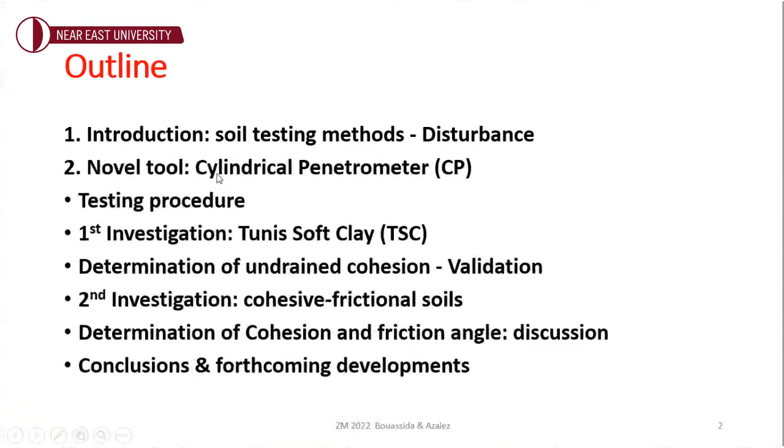The outline of this work is: introduction, so I will remind about soil testing methods and what happens with soil disturbance. Then I will present the novel tool called the Cylindrical Penetrometer, and we will present the testing procedure.

Using this tool, the first investigation was on the determination of the undrained cohesion of Tunis soft clay. For this, we suggested a method of determination, and there was validation of the cylindrical penetrometer results with the classical shear test.

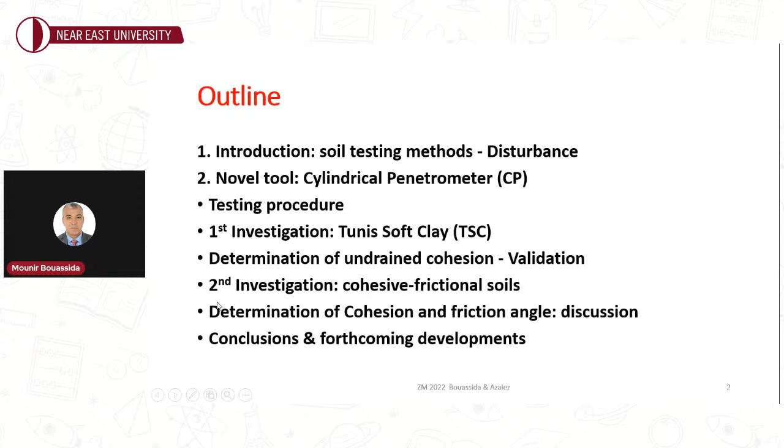As a second investigation, we will talk about the shear strength of cohesive frictional soil, and we will explain how we can determine the cohesion and the friction angle. We will discuss the proposed results, and then conclusion and forthcoming development of this work.

When we deal with in situ soil testing methods related to disturbance, we can see on this slide, for example, in the first case on the left, when we do the pressure meter test, which needs to create a borehole, the vertical sides of this borehole are disturbed. Then we introduce or put our cell measurements, and as such, when we measure the so-called limit pressure, we measure it in disturbed soil.

This is to say we are measuring failure characteristics affected by the disturbance of the soil prior to the measurement of shear phase. On the contrary, we remind about the CPT or SPT test. We have the tool placed at the bottom of the boring, and for preparing the test, we have an initial penetration without measurements, and after that the tool penetrates the soil to measure the tip resistance or the blow count.

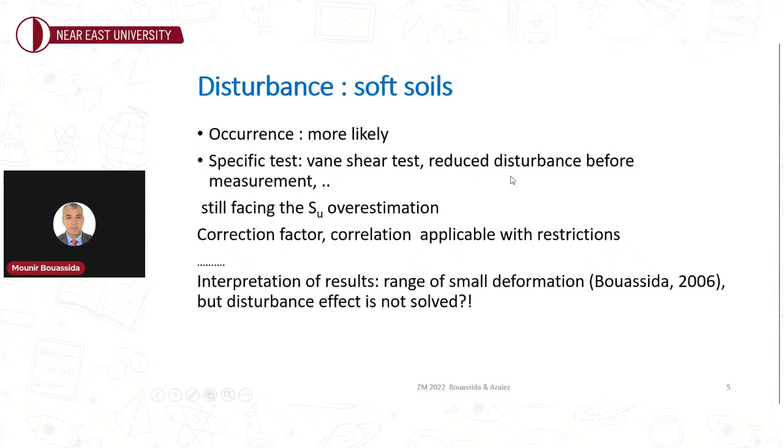In the same context, when we deal with soft soil, we have disturbance. We know that prior to the in situ test or prior to the laboratory test, the occurrence of disturbance is more likely. For example, to reduce the disturbance effect from soft soil, there is the vane shear test,

which enables us to reduce the disturbance before the measurement of the SU. But with this device or apparatus, we still face the overestimation of the undrained cohesion. And using the same methodology, we have to introduce correction factors and correlations, which are not always applicable, or applicable with restriction depending on the soft soil we are considering.

We suggested earlier for the vane shear test to limit the measurements of the torque in the range of small deformation. And we suggested the method to determine, maybe more safely, the undrained cohesion, to not overestimate these characteristics, but still the disturbance effect is not solved.

This means using the vane shear test, or performing the vane shear test, when you penetrate the soil before the measurements with the blade of the vane apparatus, we have some disturbance of the soil.

And as such came the idea of how to think about a new tool or new method of measurement to avoid the disturbance effect, and also to provide a direct determination of the cohesion and the friction angle for all soil types without using correlation. This is the main purpose.

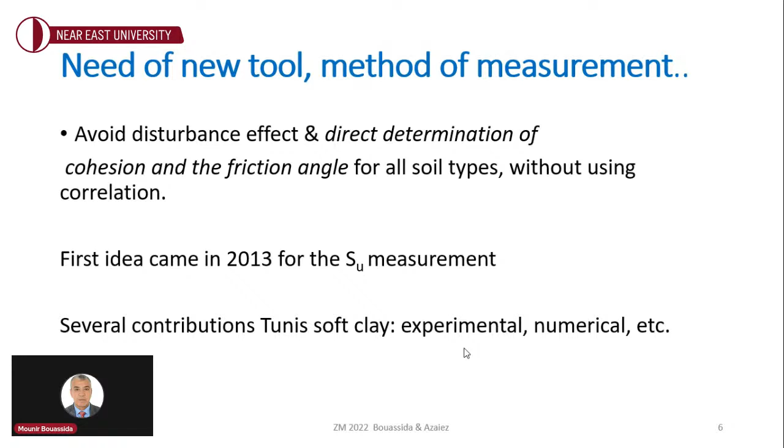The first idea came in 2013 for the SU measurements, because in our laboratory we investigate very much the behavior of Tunis soft clay, characterization, etc., using different experiments and numerical approaches.

And the first investigation concerned the Tunis soft clay. We know soft soil, its characterization informs that it has low permeability, colloidal and compressible structure, and the undrained shear resistance is reduced to undrained cohesion. The soil is purely cohesive.

But when sampling in soft clay, we have soil disturbance, and again we have unreliable determination of the undrained cohesion. So the tool we are suggesting, first we called it the cylindrical shear tool, but later, or recently, we changed it to the cylindrical penetrometer. So what are the components of the tool?

We can see here that this is the tool, and it's composed of a hollow cylinder, part 2, and a piston. The piston is part 3, on the upper side.

The piston itself comprises two components: an annular ring, part 4, and a headless socket screw, part 5. And the annular ring itself comprises an inferior disc, part 6, the lower part, and a superior disc, part 7, which we can see here.

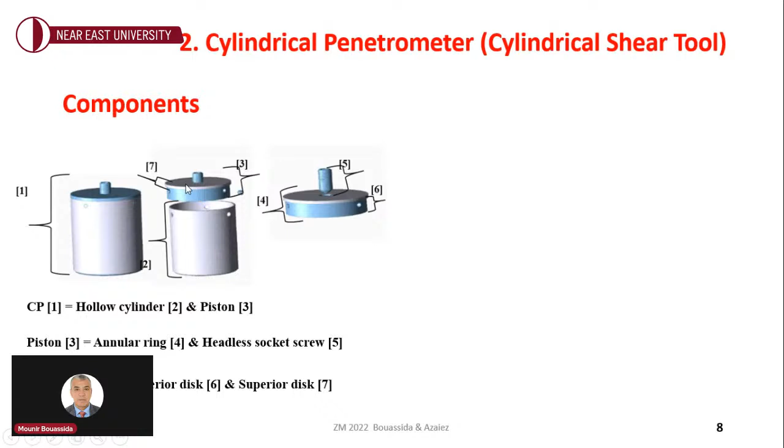So how does it work? The cylindrical penetrometer is a shear tool, and we can say it's a thin hollow cylinder with a sharpened tip. At the lower part, we have a sharpened tip of this cylindrical penetrometer.

So after preparing a soil sample, we need to position the tool. On the slide, sometimes you will see CST, the first name we gave it, sometimes you will see CP, but it's the same thing.

We need to position the tool at the upper side of the soil sample, and then similar to the SPT test, we will make an initial penetration without measurements. That means we will have a downward displacement of the tool, and we have an initial penetration D0.

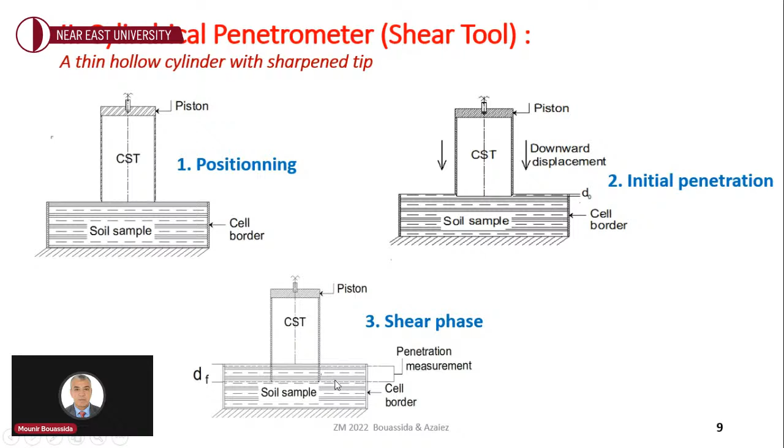Then we will start the shear phase, which is the penetration of the CP or CST over a distance going from D0, the initial penetration, to the final one, DF. So it works like a penetrometer, but without a tip. There is no tip, only the shaft component.

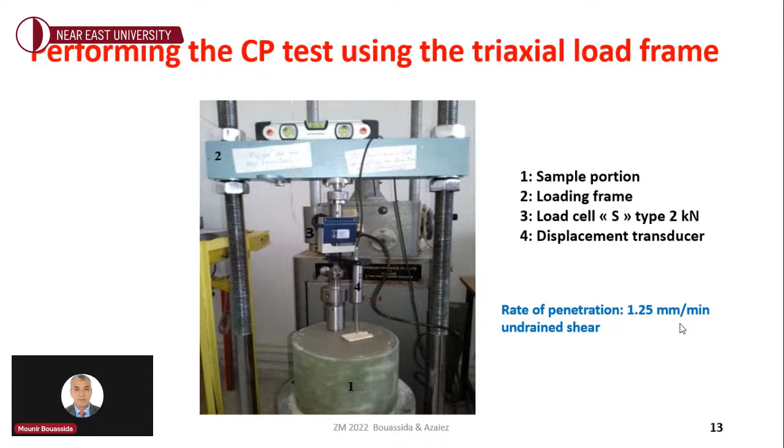Now, this is what we performed for the test, but how will we determine the SU? First of all, we can say that in terms of shear strain developed during the direct shear test and the cylindrical shear tool, or the CP, cylindrical penetrometer, there is some similarity.

But the main difference is the following: when we perform the direct shear test, we have soil-to-soil failure. But when we perform the cylindrical shear tool, we have a soil-tool failure, or CST failure. That means we measure the interface characteristics.

But first of all, for a given penetration, we can calculate the sheared area by the penetrated tool. That is both the shaft perimeter multiplied by this penetration, from inside and outside. So this is the total sheared area.

But we know, as we saw, the friction angle of purely cohesive soil is mostly zero, and the shear strength reduces to the undrained cohesion.

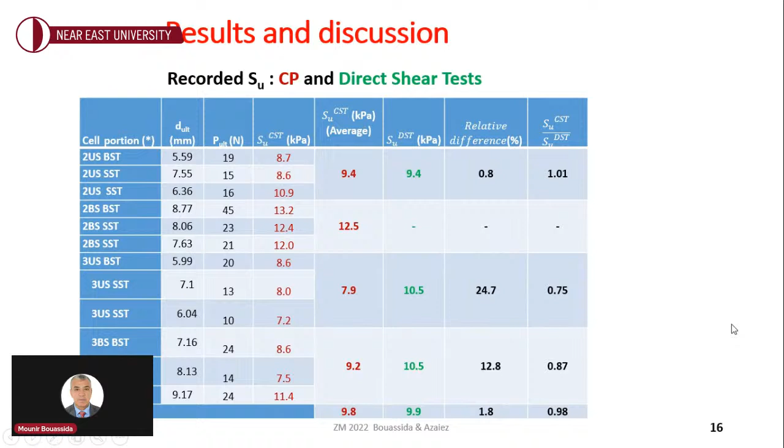But of course there is some relative difference depending on the case. We can see here that the relative difference is quite small, and the ratio between the two values is roughly 1. Only in this case - regarding this ratio, if it is lower than 1, that means the SU measured by the CST is lower than the one measured by the direct shear test. But overall, in terms of average value, depending on the case, we are in the same range of the determined undrained cohesion.

As for the purpose of comparison, to assess the CP test results for Tunis soft clay, in an earlier work we performed undrained triaxial tests, but on consolidated samples - it's like consolidated undrained. As we can see here, of course the more we consolidate, the more the SU, which relates to the failure resistance, increases a bit.

But here we can see we have the data for the test we performed under 30 kPa. And second, considering the direct shear test SU envelope from different tests, we can say that we can measure accurately the undrained cohesion of a soft soil using the CP tool as compared to the classical triaxial shear test.

Now, of course, in our thinking, it is possible to measure the undrained cohesion - maybe simpler than the cohesion of frictional soils. And as a continuation of the first investigation, we can ask this question: is it possible using the CP to measure the friction angle of a purely frictional soil?

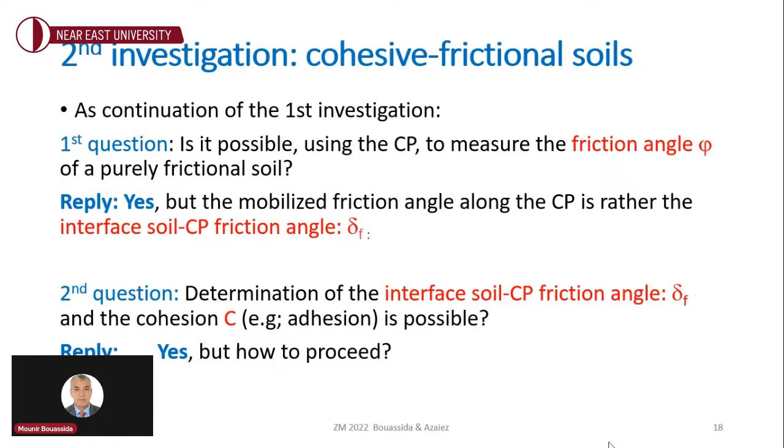So, this is maybe the part of the presentation which is not included in the paper I submitted to the conference. So, in terms of experimental investigation, we took a quarry sand, usually used for construction, and we determined the grain size distribution of the sand.

It is likely a well-graded sand with the specific gravity 2.643. And as it is a loose sand, from the direct shear test we measured about 29 degrees friction angle and 0 cohesion.

Then we performed two states of reference, meaning we compacted the sand both in normal Proctor condition and modified Proctor condition. Of course, we needed to determine the optimal water content for the two compacted states of reference. As we can see here, for the normal Proctor test the maximum dry density is a bit low, 18, but for the modified Proctor test it is rather 18.5, and the water content is a bit lower, say 10.5 or 8.5 for the modified Proctor.

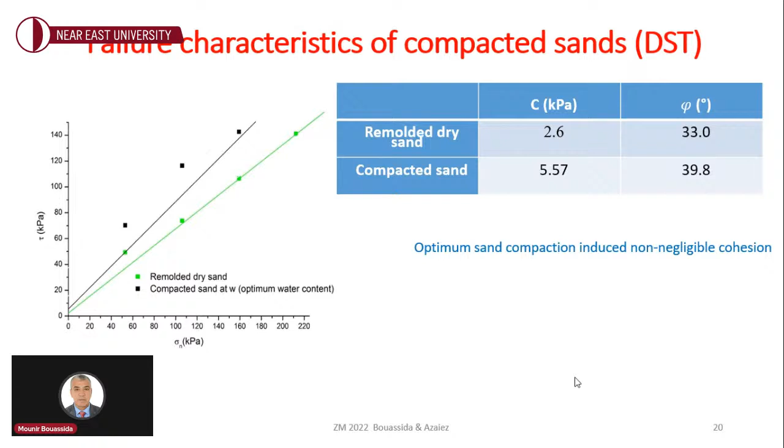Now, performing the CP test on those compacted sand at optimum water content, this is what we obtain in terms of recorded vertical force in Newtons and the penetration of the CP.

We can see we have a cloud of dots, and the average trend can be written under this form. That means, because we have fluctuation when measuring, I didn't show you the load displacement curve during the test, but we have some fluctuation. We can say that the ultimate load is proportional to the ultimate penetration.

But the problem is, as we mentioned for the soft clay, we have an increasing force. Which couple do we have to take as ultimate force and the corresponding ultimate penetration to consider for determining the failure characteristics? This is the problem.

And then here we move to the method of determination we are suggesting. So let us start first: the soil is assumed cohesionless, that means cohesion is zero.

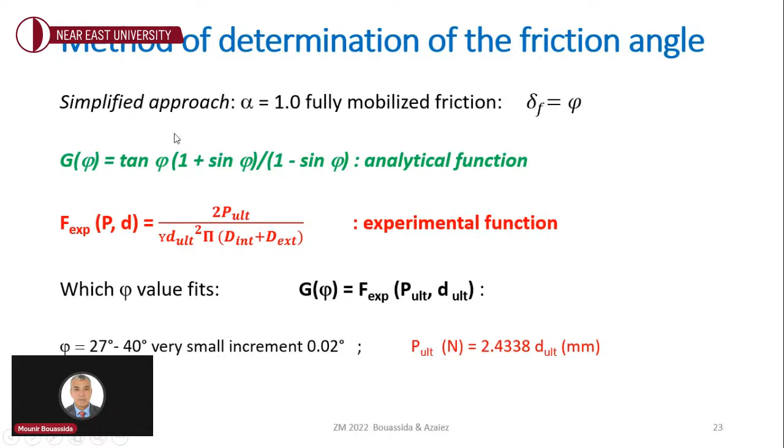And what we will do is vary the ultimate penetration and the vertical force used to calculate the experimental function, along with variation of the friction angle to calculate the analytical function. Of course we need to use Excel solver, for example, to look for the phi value considering the relative difference between the experimental function and the analytical function in terms of percentage, which is quite small.

For example, I will show you the Excel sheet later. So if I assume cohesion is 0 and neglect the weight of the cylindrical penetrometer, we determined about 39.4 degrees as the value of the friction angle. This value is a bit overestimated regarding what we measured in terms of shear strength in the direct shear test. So the way we are thinking, the way we are doing this, will help us.

So now we need to take account of the cohesion and investigate the case of a cohesive and frictional soil. Briefly, what can we say? The failure stress in terms of shear stress is C plus horizontal stress times tangent of delta f.

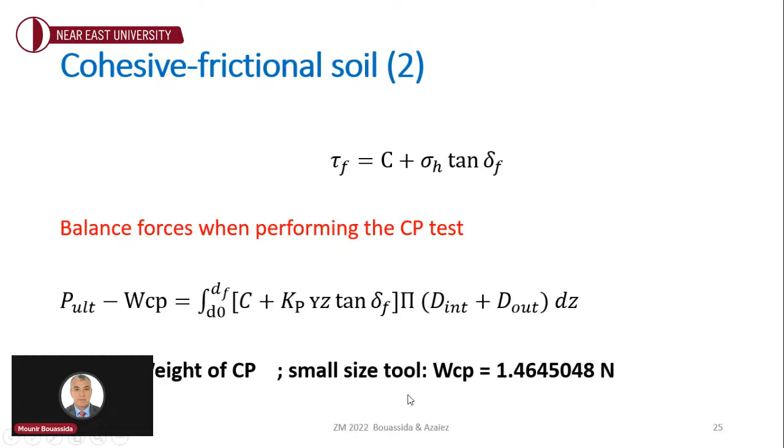And the balance of forces when performed with the CP test, I cannot go through details, but we can write P ultimate minus the weight of the cylindrical penetrometer equals this quantity. For example, using the small size tool, the weight is about 1.46 Newton. And now the expression of the analytical function remains the same, but the one of the experiment is changing.

Why? Because we have the cohesion component. Now, after the direct shear test, we measured cohesion about 5, and the friction angle was about 40. I will show you right now on the Excel sheet that we obtained a very similar value using this method of resolution.

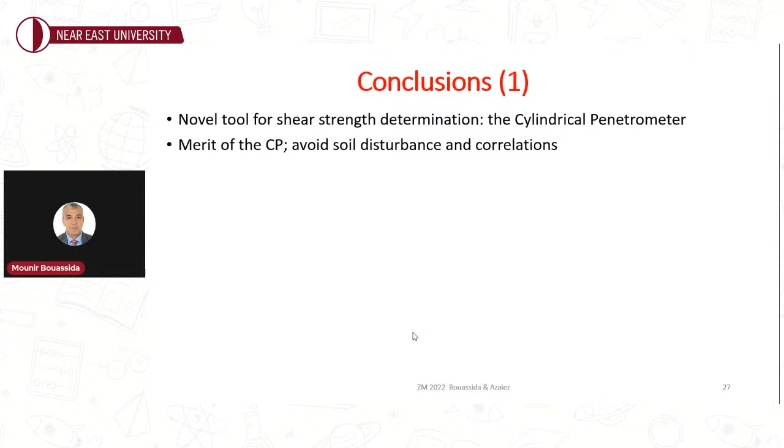So now to conclude about this work, we suggest a novel tool for shear strength determination, called the cylindrical penetrometer. The merit of this tool is to avoid soil disturbance and the use of correlation at the same time.

From experiment, we manufactured two cylindrical penetrometer models, and we considered first the constitution of two soft clays and performed some tests. It's not only determination of SU, but we suggest a novel method of determination of SU specific to cylindrical penetrometer, and the measured undrained cohesion is found somehow dependent on the CST model diameter. Using the small size or the big size tool, we determine quite similar SU values.

The assessment of the CP test results for soft clay was done after comparison with direct shear and triaxial shear test results. The recommendation, of course, is to do more tests for other, maybe soft soils, etc.

Now the second part of the conclusion, regarding the cohesive frictional soil, we can determine the friction angle and the cohesion, but the method assumes a presumed soil cohesion, and the friction angle can be determined accurately. The assessment of CP results with direct shear test is promising.

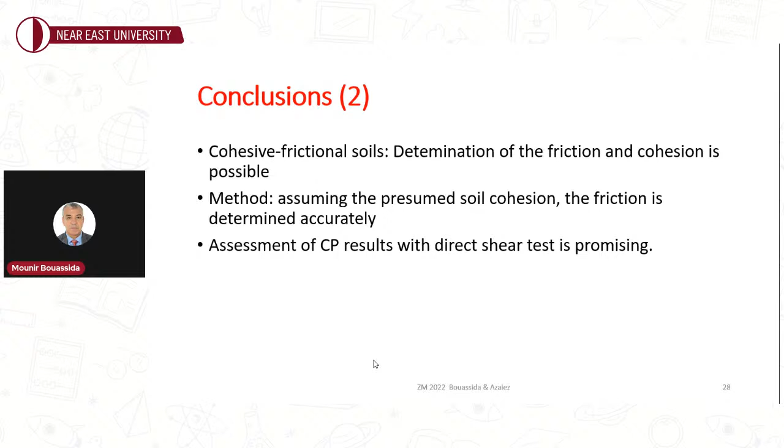So after the Excel sheet calculation I am suggesting, for common development, we use the CP for testing intact soil specimens collected from geotechnical investigation, in situ geotechnical investigation. We already started this work. And the CP, as I hope you understood clearly, is a model of Shelby tube, which we usually use to collect samples.

But in situ investigation is very feasible using this tool, and it is programmed to use the cylindrical penetrometer to determine the cohesion and friction angle using an in situ test, say in full scale condition.

About publication, because it's recent work, in 2021 we had a paper at the Third Asian Conference on Physical Modeling in Geotechnics, and we patented this tool at the national level in Tunisia, and we submitted the PCT. Let me tell you that for the national one, it is agreed, but for the PCT, the reviewers say that it's not original work, but we did not respond to them yet.

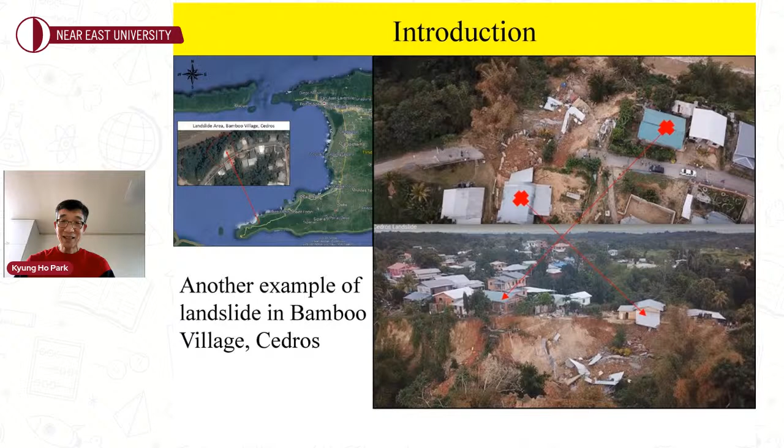Then one question arises: what caused these slope failures? First, it is not rain, which is the most common trigger of slope failures around the world. There was no record of rainfall before and during the slope failures. By the way, the local residents claimed that they saw leakage from the water pipe, and they believed the slope failures were caused by the leak in the water pipe. Could a water pipe leakage be the cause of these slope failures? This study was started to find an answer to these questions.

For the methodology, first we collected a geotechnical investigation report from local companies. EISL, a local company, conducted this landslide investigation in 2016. From the EISL landslide investigation report, a typical cross-section for landslide B was obtained as shown in this slide, and information on the soil condition of the slope was summarized in this table.

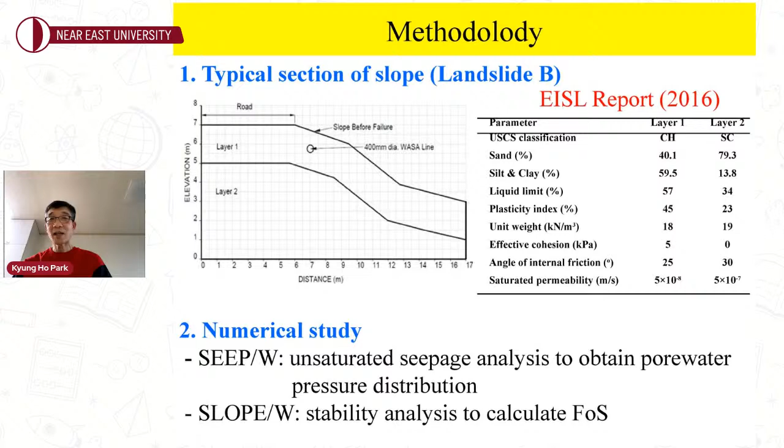This slide shows a typical modeling mesh used in this study. One of the important factors in this numerical study is how to model the water leakage. In this study, the flow rate was used, varied from 10 to the minus 7 to 10 to the minus 6 cubic meters per second at the location of the pipe expected to be leaking water.

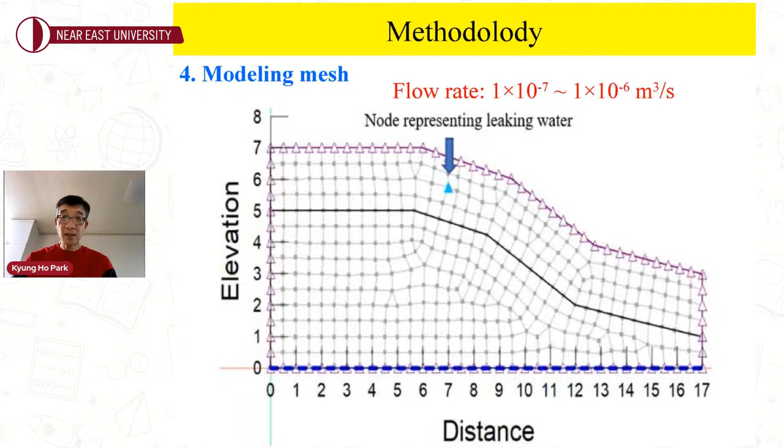From this result, we can see the flow rate is one of the important factors that can be considered in the slope stability analysis. Next slide, please.

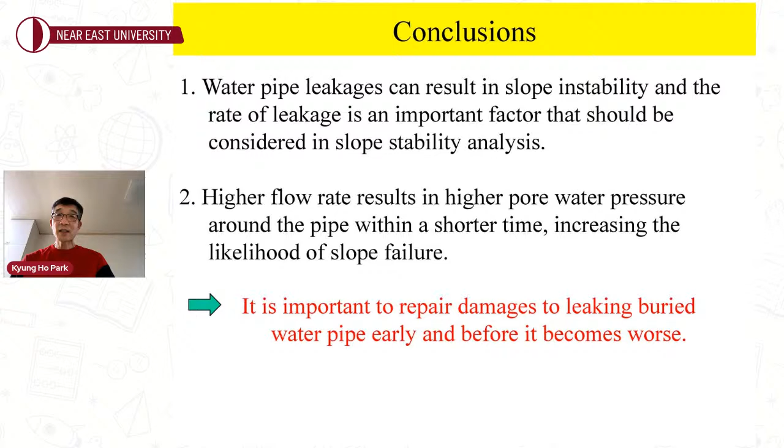Second, higher flow rate results in higher water pressure around the pipe within a shorter time, increasing the likelihood of slope failures. Thus, it is important to repair damages to leaking buried water pipes early, before it becomes worse. This is all my presentation, and thank you very much for your attention.

Thank you, Mr. Park, for your presentation. Interesting issue about slope stability and pipe leakage. I was wondering if the depth of the failure surface is known, the zone of the failure surface, because what I was thinking is the landslide may have caused the pipe to be damaged and leak.

Oh, that was also possible. It's a really good question. I was also thinking about that, but I still cannot give a clear answer for that. It can happen in certain areas in Trinidad.

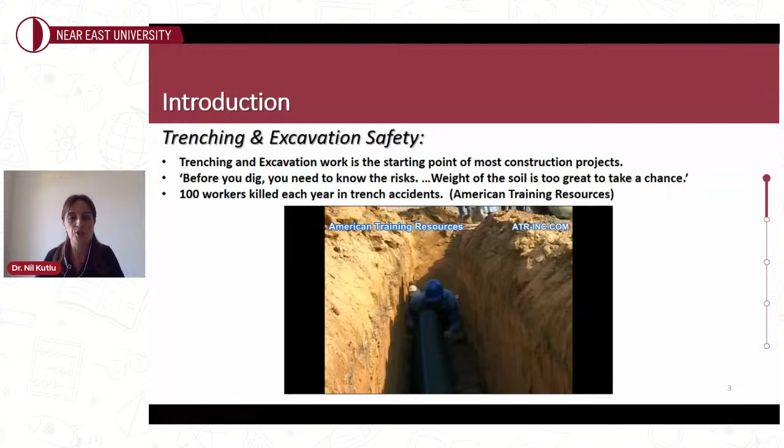The safety in trenching and excavation works is the main motivation for this study. Trenching and excavation work is the starting point of most construction projects, mostly associated with unsupported cuts. As we can follow from the video, this type of work is dangerous - the collapse of even a 1.5 meter height unsupported cut can kill field workers due to the great weight of the soil.

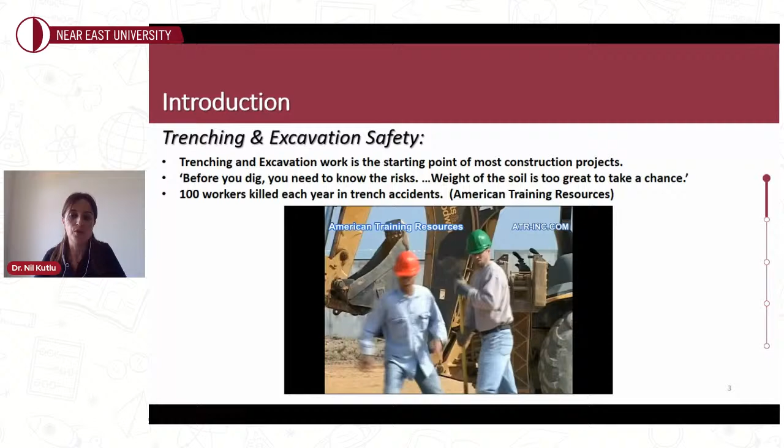According to American Training Resources reports, more than 100 workers are killed in trench accidents each year on average, which means every week 2 workers die in a trench cave-in. Therefore, before we excavate, there is a lot that we need to know, and also a lot to estimate about the soil.

On the other hand, if we are able to excavate without support, especially in sandy types of soils, this usually means that the soil is in a state of unsaturated condition, where the expected behavior can be explained more accurately by the use of unsaturated soil mechanics principles.

We can simply say that the stability of cuts is controlled by the matric suction distribution in the field for the unsaturated zone above the groundwater table level. The critical height and the stand-up time are the two most important factors that need to be considered during an unsupported cut design.

Critical height can be estimated using different approaches: analytical estimations, numerical estimations, and experimental validations. In the research we are presenting, we use numerical estimation and experimental validation methods and compare the results to see if they match.

So the testing program - first I would like to start. The entire experimental program aims to determine the critical height of an unsupported vertical cut in sandy type soils for varying water table levels associated with different suction profiles that actually occur.

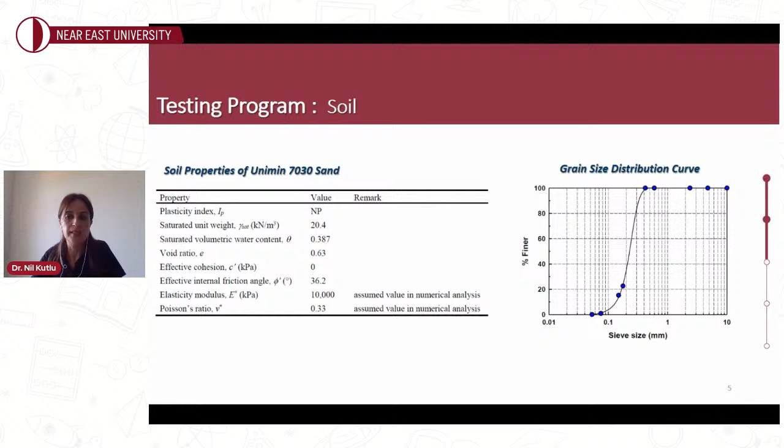For this purpose, the studied soil is an industrial sand, referred to as a fine sand. In the slide, you can see the basic soil properties and also the grain size distribution curve.

To give more details about the testing setup and equipment, the experimental testing program was performed at the University of New Brunswick in the Geotechnical lab. The test setup consists of a large-scale soil tank with dimensions of 1.5 meters by 2.2 meters and a total height of 2.4 meters. The sand is placed inside the tank by compaction.

Then, with varying water levels, the critical height for the unsupported cut is determined. But in the context of this paper, only the water level condition located at 0.7 meter depth from the surface is considered. So I'm going to share the experimental and numerical results only for the groundwater table level located at 0.7 meter depth from the tank surface.

In order to determine the matric suction variation, high-capacity tensiometers are used, and the measurements indicated that in the unsaturated zone, a hydrostatic negative pore water pressure distribution has been maintained.

The next question can be, how did we simulate the excavation? To simulate the vertical excavation, 0.1 meter height retaining panels, as seen in the figure - the black retaining panels, each with 0.1 meter height - are used, and they were removed one by one until general shear failure took place. At the very end of the slide, we can see the failure incident, the plan view at the moment of the failure is shown in the figure.

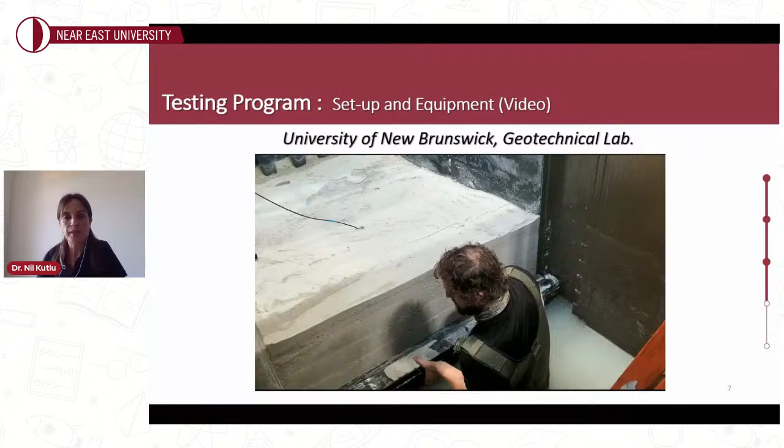As I said, here we only consider a single water level. In our case, failure took place when we reached the critical height between 0.7 meter to 0.8 meter, when panel 8 was removed. So the general shear failure looked like this once the critical height is obtained.

And then we have our second part of our study as the numerical analysis part. The testing program was also simulated with Plaxis 3D to estimate the critical height. The sand was modeled here as a Mohr-Coulomb material using effective shear strength parameters. The Van Genuchten model is used for the soil water characteristic curve definition, which fits well with the measured data. Here in the figure we can see the Plaxis 3D model, including the geometry, mesh, and boundary conditions, to simulate the experimental conditions.

In Plaxis 3D, if we consider the unsaturated condition, the contribution of matric suction on total cohesion is also considered by the model proposed by Vanapalli et al. in 1996. This model is also adopted in Plaxis 3D.

On the left-hand side we have the variation of total cohesion with depth. We had the maximum total cohesion of 2.7 kPa, obtained at 0.25 meters from the test tank, and as we have seen it reaches zero once it is below the groundwater table level. Above the groundwater table level, the tensiometer measurements confirm that there's a hydrostatic negative pore water pressure distribution.

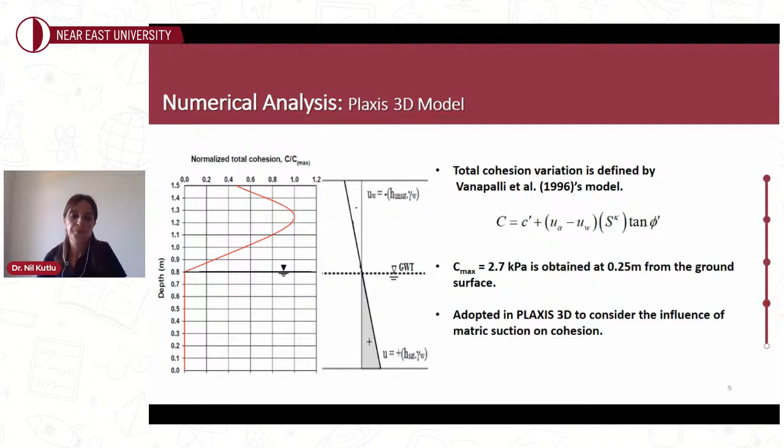For the numerical analysis results, the stability checks and stability analysis were performed using the Plaxis 3D model. During these stability models, the stability of the excavation was estimated by calculating the global safety factor using the phi-c reduction method. The table shows these details by depth of excavation.

We simulated the experimental testing setup completely, doing a stage analysis step by step. By removing the panels, we calculated the global safety factors, and we can see that with each excavation the global safety factors are reduced.

It dropped to 1.15 after the 7th panel was removed in the model, and removal of the 8th panel caused failure in the unsupported cut. This indicates that the critical height is again reached between 0.7 meter and 0.8 meter, similar to the experimental results.

Another two interesting results we would like to share: looking at the Plaxis 3D results in plan view, the disturbed soil zone formed an arced shape area, indicating the boundary effect of the test tank. Also, we attained a failure wedge making an angle of 62 degrees with the horizontal, which matches the slip line angle for the active condition.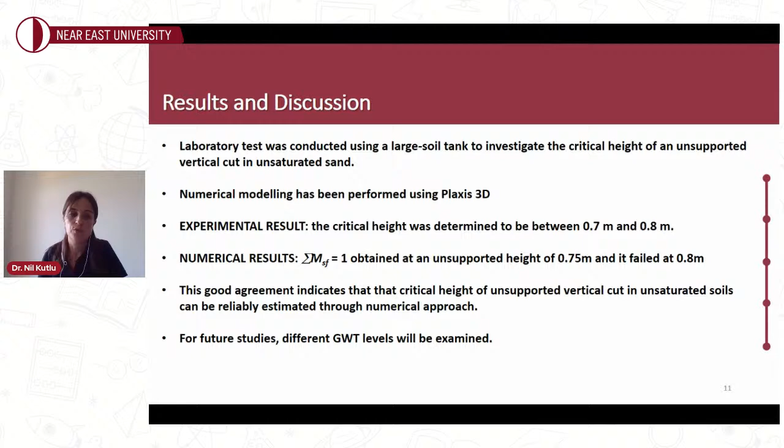To sum up the results and discussion, we performed laboratory tests using a large-scale soil tank to investigate the critical height, and we also performed numerical modeling analysis using Plaxis 3D. Both the experimental and numerical results give the same critical height, between 0.7 meter and 0.8 meter. This good agreement indicates that the critical height of unsupported vertical cuts in unsaturated soils can be reliably estimated through numerical approaches. For future studies, different water levels will also be examined. Thank you very much.

I appreciate it. Thank you, Ms. Kutlu, for this nice presentation. Thank you, we will be moving to the next presentation. Okay, thank you, sure. Have a good day. We have the next speaker, Mr. Yan Liu, I assume is here.

Yes, welcome, Mr. Liu. This topic will again be related to rainfall and slope stability. You can share your screen. Yeah, I'm sharing. Okay. You are joining us from Japan, right? Yeah, yes. Welcome. Thank you. So sharing, it shows it's uploading. Let's see. Okay, it's not on the screen yet. It's processing. Okay, let's see. Okay, maybe. Yes, now we can see your screen. Thank you. You can start.

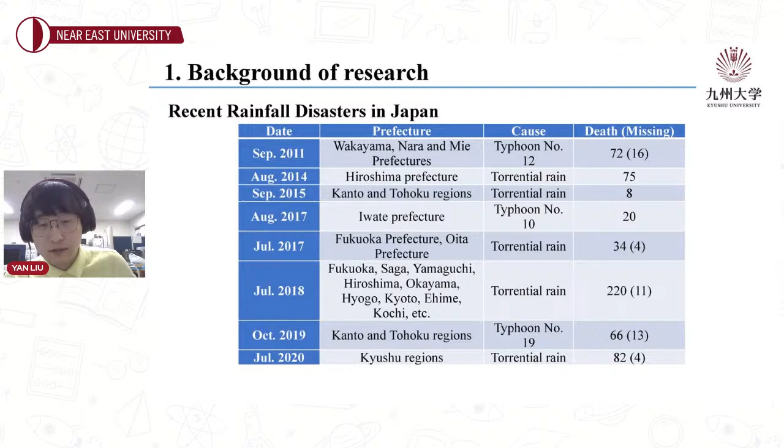This table shows the recent rainfall disasters in Japan, and we can see that every year a lot of people are affected by rainfall-induced disasters.

This is the failure modes of the rainfall-induced landslide. From the analysis of different kinds of landslides, we find there are mainly two kinds of landslide failure. One is deep failure: the slope becomes saturated from top to bottom because rainfall infiltrates, and the slip crosses from the saturated to unsaturated part, causing a landslide.

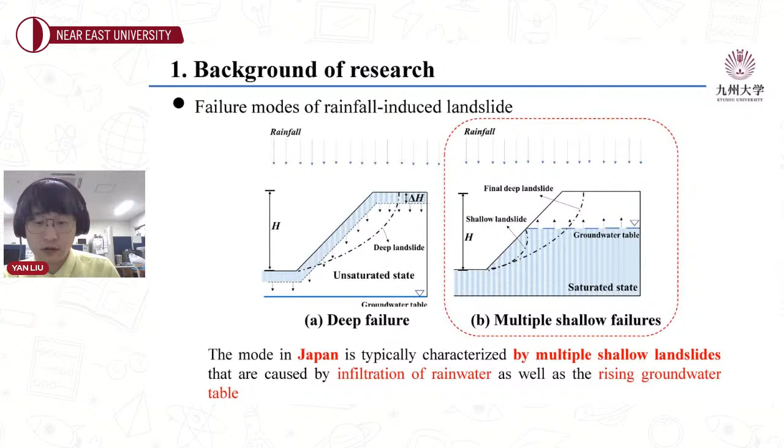Another is shallow landslide, which occurs from the bottom to the top area due to the increase of the groundwater table. In Japan, we find a lot of sandy slopes outside, mainly caused by shallow landslides. So this part of the research focuses on shallow landslides.

The objective of my research is to identify the main hydrologic behaviors of sandy slopes. We will also evaluate the local safety factor at different rainfall times and rainfall groundwater table levels, and obtain the displacement and flow state under rainfall.

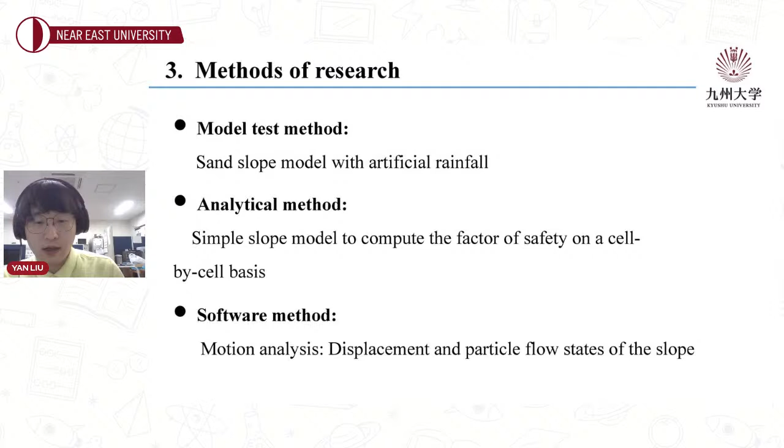So we will conduct the sandy model test with artificial rainfall, and also do analytical analysis to get the safety factor. We will use software to get the displacement and velocity of soil within the slope under rainfall conditions.

For the software methods, we use motion analysis, which can be used to get the displacement of soil, the flow state of the slope, and the soil motion track. We use PIV to get the soil velocity. This is the principle of the motion analysis.

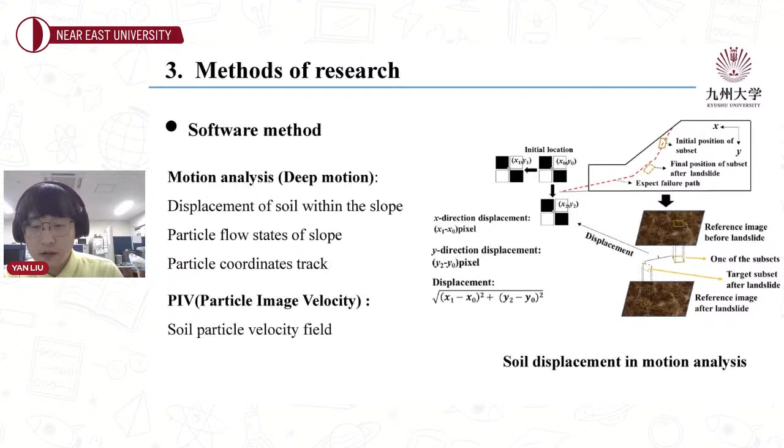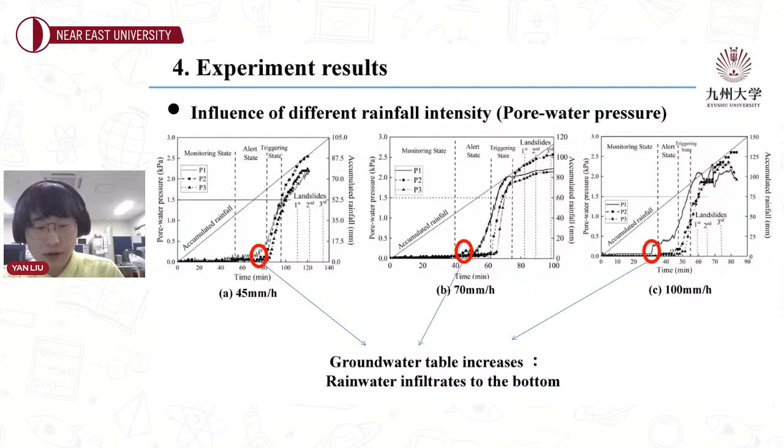This is motion analysis from our experiment. It records the soil movement at 100 millimeters per hour. We can see that first is the initial slope, which is in an intact state.

The first landslide happened at 59 minutes, the shallow landslide occurring at slope toe. As time increases, we find the second failure from the bottom of the slope, and the last landslide failure starts from the top of the slope.

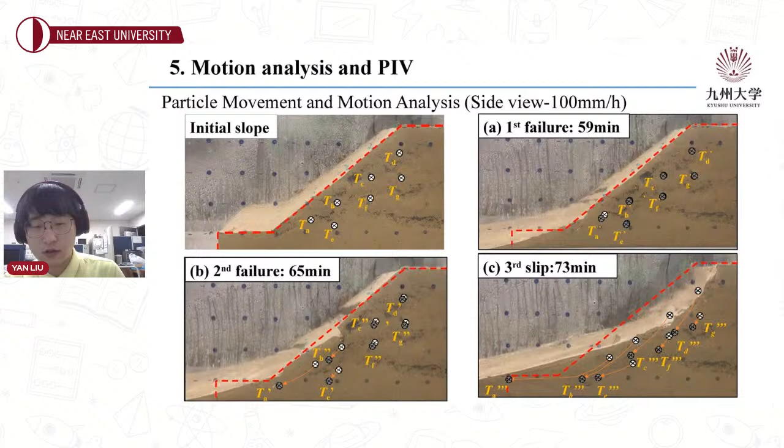From the motion analysis and PIV, we find that stronger rainfall intensity will always cause more effects on the slope, resulting in a faster collapse time. From the first landslide to the last landslide, the time is very short—it only takes 14 to 24 minutes. So we need to prepare a lot of work before the landslide happens to protect lives.

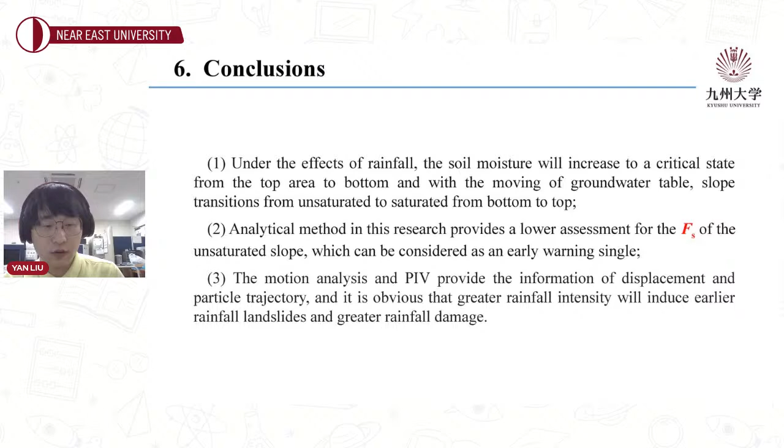It can be used as an early warning signal for this work. The motion analysis and PIV also provided information on displacement and particle trajectory. We can see easily that greater rainfall intensity will cause earlier landslides and greater rainfall damage. That's all for my research.

Thank you. Thank you, Mr. Liu, for your nice presentation. I was wondering, not about your presentation, but are there any early warning systems in Japan? Are you aware of any early warning system?

Yes, our group also focuses on early warning systems based on IoT. We use different sensors, microcomputers like Raspberry Pi, connected with different sensors, placed outside with Wi-Fi and LPWA for data transmission. We also focus on this area. This is a very small early warning system.

Yeah, okay, very good. Thank you for your presentation. Thank you. We go to the next speaker in the session. This will be about GIS susceptibility maps for shallow landslides, a case study in Canada. Michael Barbosu, Professor Barbosu, welcome. You can share your screen.

Hi, Nijan. Hi. I want to thank you, and thank you, Professor Cavit Atalar, for all the work he did. Here is my screen now.

Okay. Let me see. Is the share button working? Yes. It's just uploading, okay, maybe it takes some time. If not, I've sent the file anyway. Okay, let's just see if it can upload. Trying to share the screen. Can you see my screen? Right now I don't see, but let's wait, if it's uploading something. It's not visible yet. Does it say something on the screen? Ah yes, now it appeared. Okay, great, you can start.

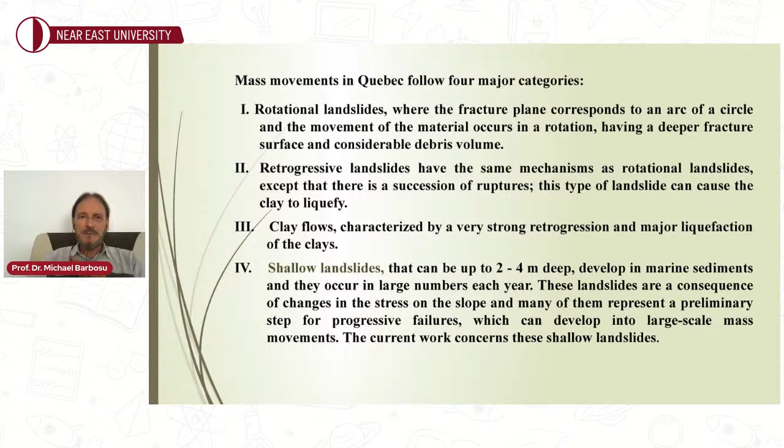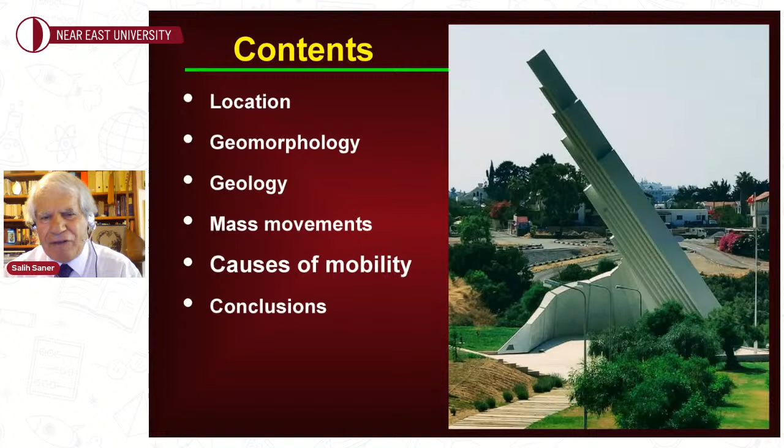This is the area again from another view. This is the monument here, and it's the beach area, about 7 kilometers from the city center of Girne. This is the beach today, a private beach, and its continuation is going to be a municipality recreation area and beach facilities. As you see, there is a plateau area here and a slope. So we wanted to study the suitability for ground movements—is it going to be a landslide area or what?

First, we started by checking—there is not a river, but a small creek bringing some water. This is the coast area, and a river is coming to the area. According to our estimation, this drainage area is receiving 960,000 tons of rain, and about 320,000 tons—roughly one-third—is flowing to the sea through this creek. Our statue is here.

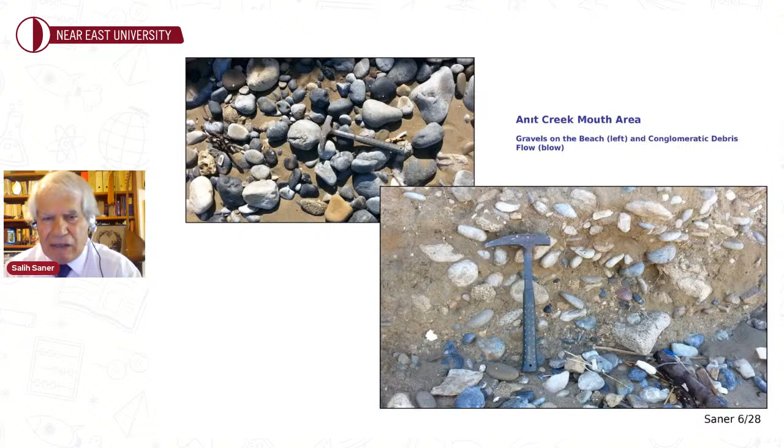Then we found an outcrop of a mass flow—mud flow, or debris flow, whatever. This debris flow, and also the river, is bringing material from time to time when we have flooding. So this means the river, with the rains, may bring material, or there may be mass movements bringing something.

We said we need to know the geology of the coastal area. This is the material brought by the river, and on the top, this yellow area—I don't know whether my cursor is seen there.

The yellow area is a young limestone. This is a shale slope area, flysch formation, dipping towards the sea. And this one is a horizontal limestone, very young, about 1 or 2 million years old, horizontal laying, and forming a plateau in the area.

You see there's the plateau. This is not exactly from the side. A kilometer away I went to check this photograph. The plateau is making a scarp, but here we don't see the slope because shale is starting at the sea level.

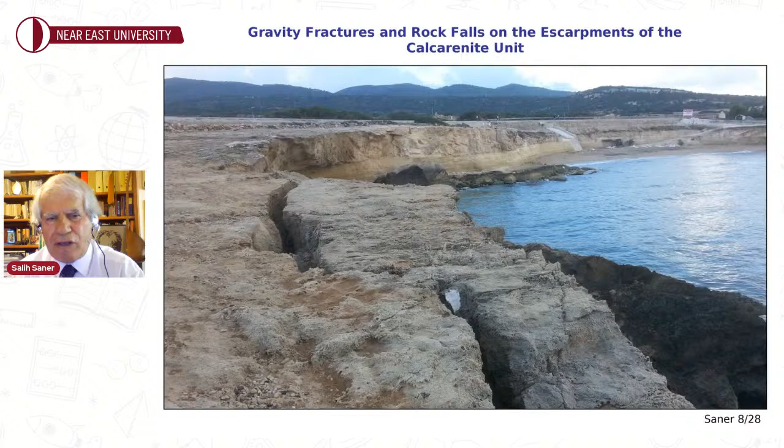At the edges of the plateau there are scarps and gravity fractures which are possible. In the site, here's the monument at the northern corner. You see the monument and some limestone blocks there, because when they were constructing this monument...

Actually, this was a strong cap on the shale. They pushed the rocks down, opened a flat area for digging foundation ditches, and removed it. They made good engineering and put the statue on shale. This is how the shale outcrops are seen in the area, very thin bedded.

When you take it in your mouth and chew it, it is like chocolate. There is no coarse material in it. The taste is not like chocolate, but the chewing is very soft.

I took two samples and put them in a beaker. In half an hour, this one is a rock, but the other in half an hour became mud. So it disintegrates with water. The surface is always soil formed from alteration of these shale layers. There is no thick sandstone to give it strength.

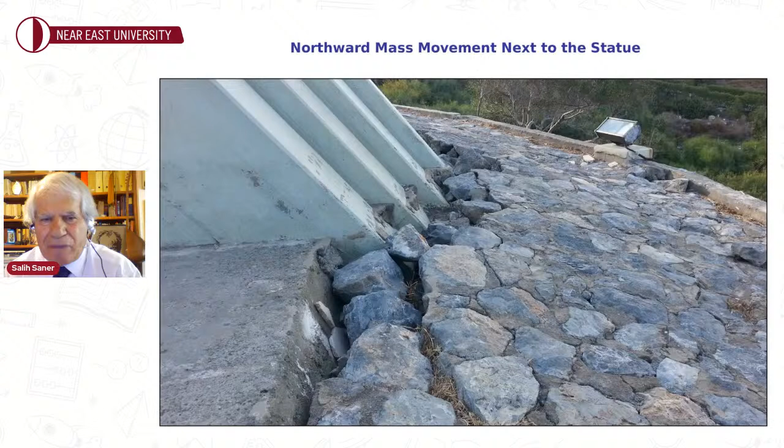Therefore some movements can be seen in the area. You see blocks placed around the statue moved, buckling of the retaining wall, and on the floor of the statue there are cracks. This is the foundation where fracture occurred.

There are these kinds of things always showing us some movements, instability. There is no big movement yet, but these are indications for the future, a possibility. We have to consider the ground structure, ground geology.

In the petroleum industry, 30 years ago, they came up with a sentence: do not do it without GNG. People nowadays are going with computers, modeling. Yes, we have to model, but your model should depend on correct geology first, geology and geophysics. At that time, it will be correct.

Here, as I told, the limestone forming a plateau is a strong rock. It is about 20 meters thick in the south, and this one is shale. The beddings are real beddings, this way. Sea is here, coast is here. So bedding is in this way.

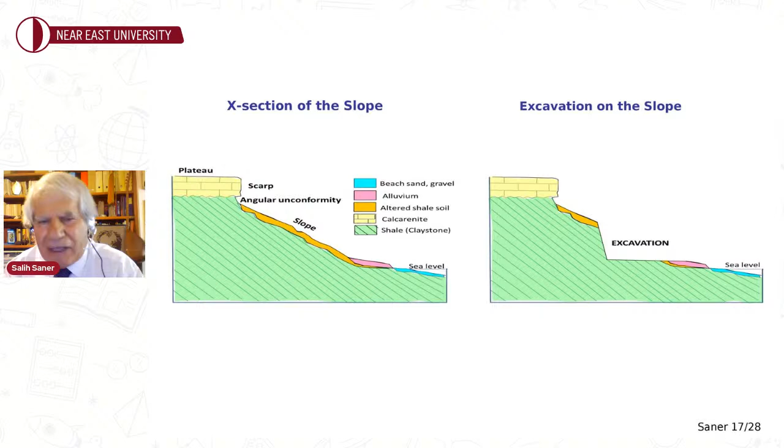You have to be very careful. So what we are saying is no big damage observed, but there is some damage. Geological structure and bedding properties of the shale unit indicate a risky ground for construction.

Shale slope should not be disturbed, we are saying, because the alteration that is making shale soil is protecting the real outcrop from water. Because, as I said, the rock gets disintegrated in water.

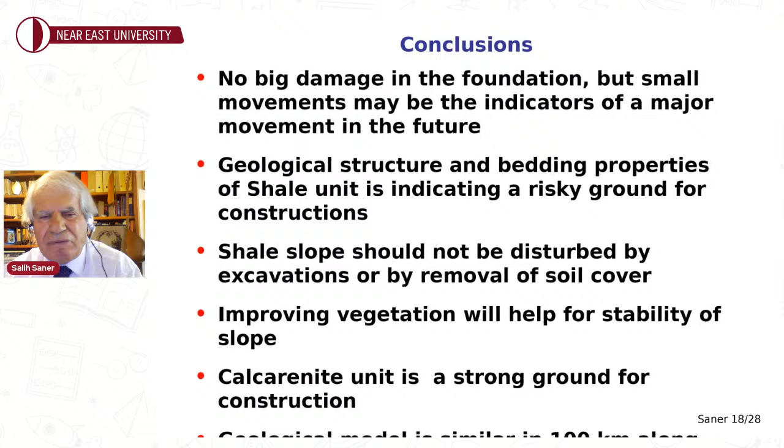We have to improve vegetation in the area. Also, the limestone forming the plateau should not be removed in the area. This geological model that we made in this study, we observed exactly the same situation in 100 kilometers distance along the North Shore. So in Girne or other villages, within 100 kilometers, the problem is the same. This is all I wanted to tell you today.

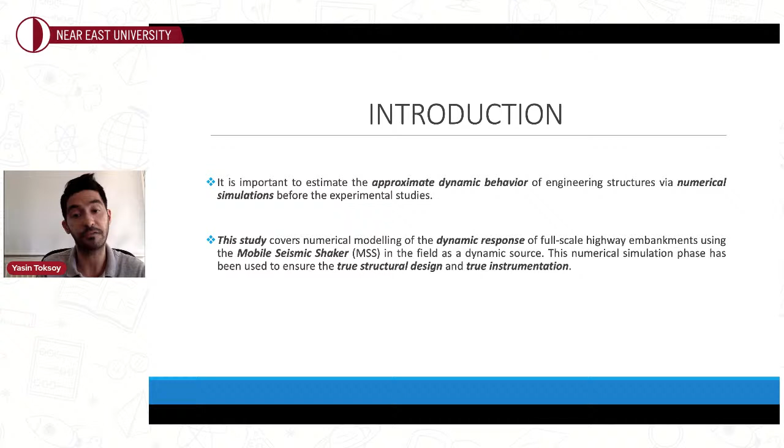It is important to estimate the approximate dynamic behavior of these engineered structures via numerical simulations before experimental studies. This study covers numerical modeling of the dynamic response of full-scale highway embankment models using a mobile seismic shaker in the field as a dynamic source. This numerical simulation phase has been used to ensure the correct structural design and correct instrumentation in the field. The simulations were performed using the finite element modeling technique with Plaxis 2D software, and include dynamic response analysis of dimensionally identical unreinforced and geogrid-reinforced highway embankment models.

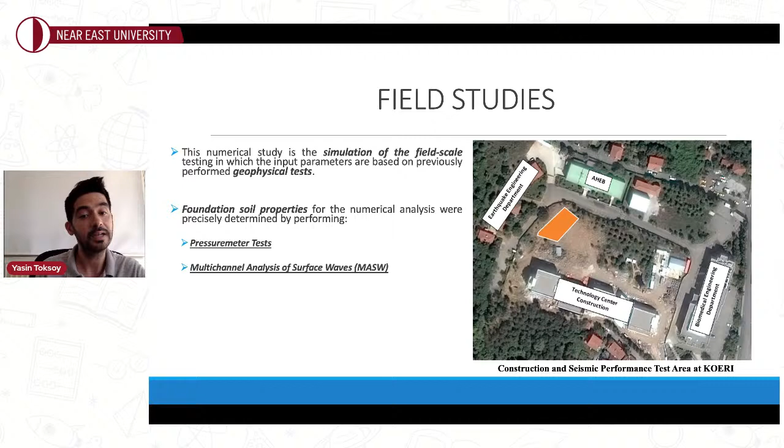Here in the picture you can see the test area I'm talking about. This numerical study is a simulation of the field scale testing, in which the input parameters are based on previously performed geophysical tests. The foundation soil parameters for the numerical analysis were precisely determined by performing pressure meter tests, MASW tests, 3D ERT tests, microtremor tests, and field vibration tests.

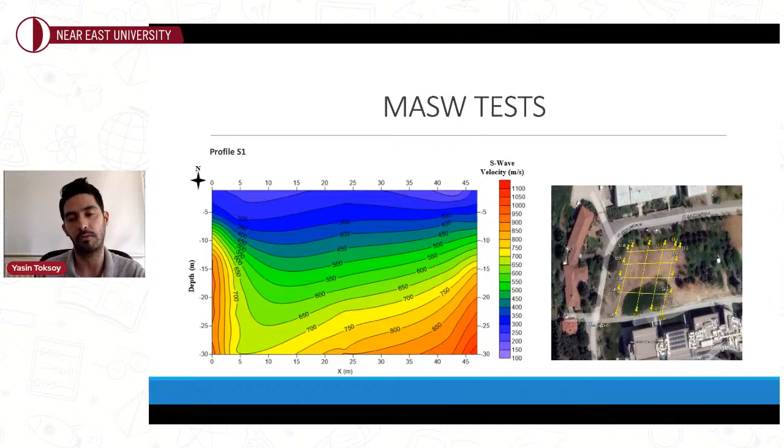First, we performed pressure meter tests in the proposed test area to obtain the elastic modulus profile of the test area. This parameter is crucial for the calibration of the numerical models. After that, we performed MASW tests along 8 profiles, as shown in the lines in my defined area. For each of the 8 profiles we determined shear wave velocity profiles up to 30 meters of depth, which we also used for calibration of the models and for selecting the proper location of the embankment models in the test area.

The other geophysical test we performed is 3D electrical resistivity tomography. This is one of the oldest and most commonly used geophysical exploration methods, and it is very useful for characterizing subsurface materials in terms of their electrical properties.

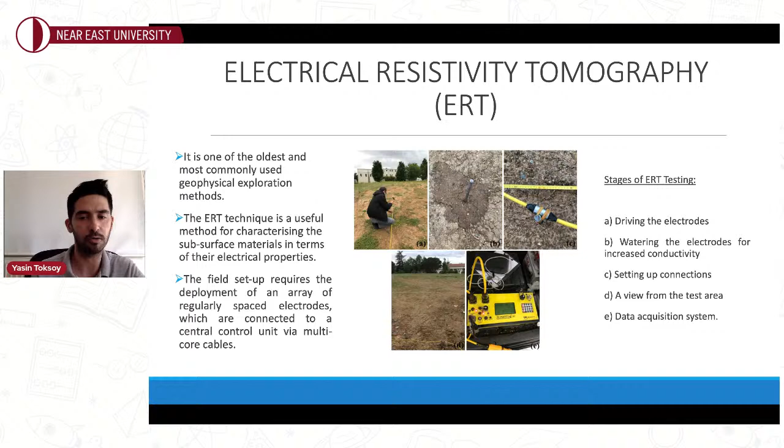This field test setup requires deployment of an array of regularly spaced electrodes like this. We have 86 of them in this example, connected to a central control unit via multi-core cables. This is very useful, especially to monitor subsurface conditions, any discontinuity, faults, or sinkholes.

We also performed microtremor tests. This is a low amplitude ambient vibration of the ground caused by man-made or atmospheric disturbances. Observation of these tests gives us useful information on the dynamic properties of the test site, such as the predominant period and amplitude, and it is commonly used for microzonation studies.

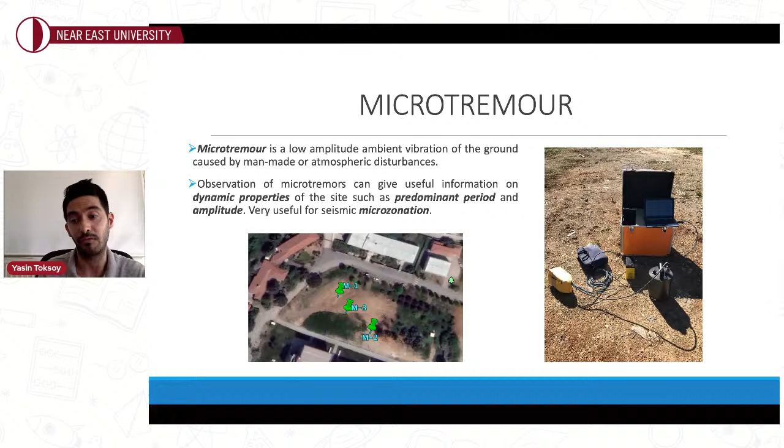In this study, we performed 3 microtremor readings for 1 hour each using 3 different seismometers, and we obtained the site characteristics for 3 sites. We obtained the natural frequencies, predominant periods, and H/V ratios.

In addition, we also performed field vibration tests. To investigate wave propagation properties in the test area, we placed a series of 12 geophones in a line and used the mobile seismic shaker owned by our department as a dynamic source. We have many different parameters, like a 50-case parametric set.

As you know, when we perform dynamic response analysis in finite element modeling, you have to define special boundary conditions to avoid distortions and unrealistic results. That's why viscous boundaries are defined at the edges of the meshes.

The model design and highway embankment material selection were carefully defined to meet both the 1993 AASHTO and 2013 KGM technical regulations at the same time. The thicknesses of the asphalt concrete layer and granular aggregate base layer were defined as 15 and 30 centimeters respectively for all cases to meet those regulations.

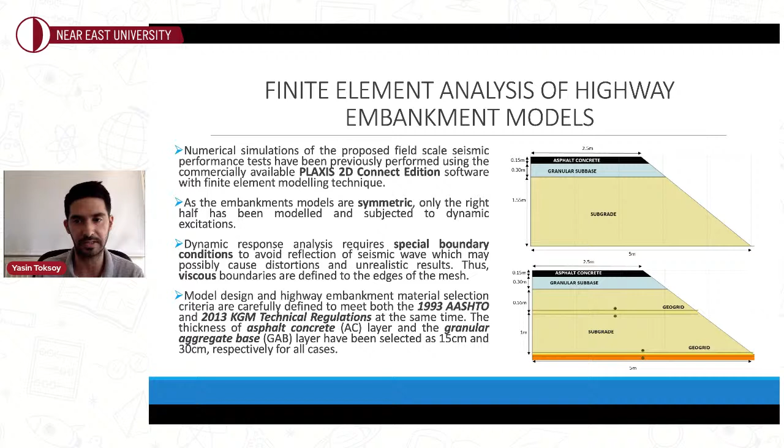Those are the material models, as you can see. The material properties of each element were carefully selected in accordance with current regulations and the latest literature. The foundation soil parameters, however, were previously determined by the field tests and geophysical experiments I mentioned a few minutes ago.

We used geogrid reinforcement in one of our models. This is a biaxial one with an ultimate tensile strength of 40 kilonewtons per meter, and it meets FHWA regulations.

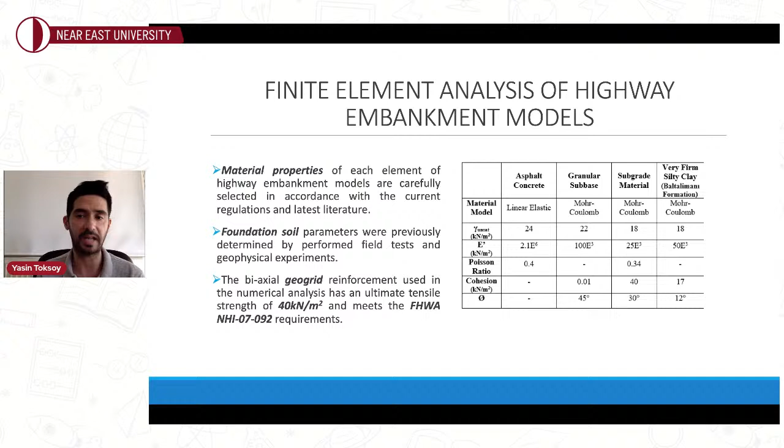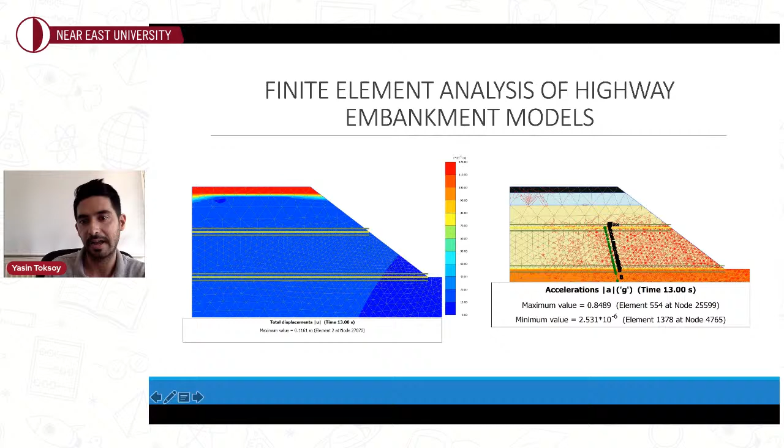But when we apply 2 layers of geogrids, integrating one at the bottom and another at the middle height, the total displacements decrease to around 12 centimeters, still concentrated at the crest level. Also, accelerations are attenuated from 3.9 G to 0.85 G, and the transmitted accelerations are concentrated around the geogrid reinforced zone, not at the crest level.

So to sum up my numerical results: performed dynamic response analysis of the proposed embankment models revealed that the geogrid reinforcement can substantially and successfully reduce the total displacements and the transmitted accelerations at crest level, and these are the key structural performance indicators.

With the help of this geogrid reinforcement, it provides additional tensile strength. That's why the total displacement is around 20% less in the geogrid reinforced model when compared to the unreinforced one.

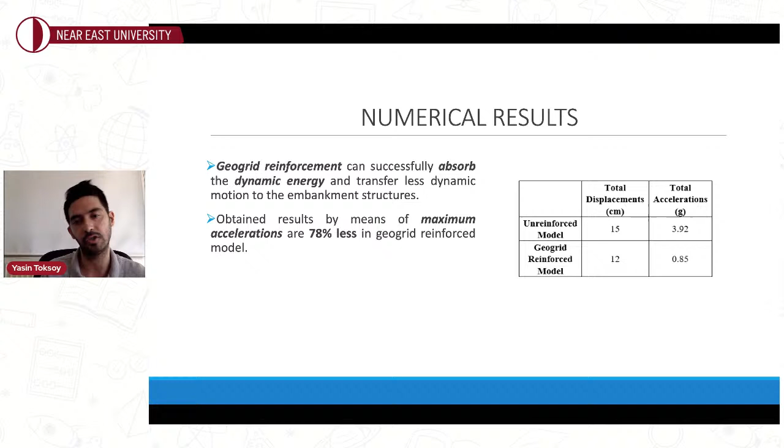By means of total accelerations, geogrid reinforcement can successfully absorb the dynamic energy and transfer less dynamic motion to the embankment structures. The obtained results show maximum accelerations are around 78% less in the geogrid reinforced model when compared to the unreinforced one.

These results highlight that geogrid reinforcement is an effective reinforcement element to mitigate the earthquake hazards of highway embankment models. We would like to thank Boğaziçi University Research Fund with the given grant number for supporting this study.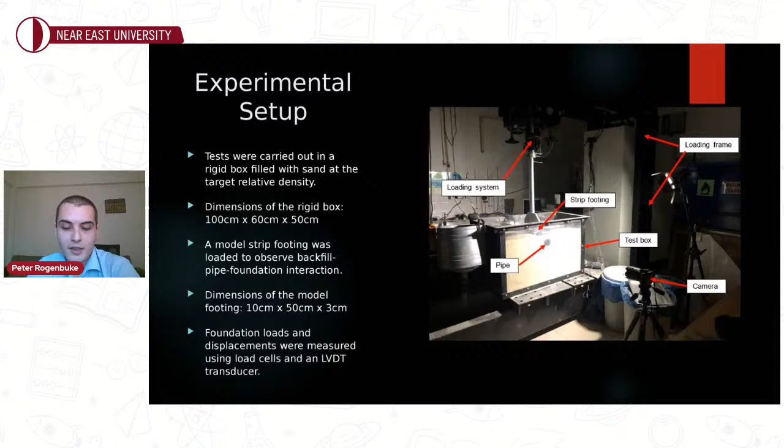We took photos for image analysis at every 2 millimeters, or every 12 seconds if we convert it like that. Our failure criterion was chosen as the displacement at 10% of the foundation width, which corresponds to 10 millimeters, since our foundation width is 10 centimeters. So 1 centimeter settlement is our failure point.

For image analysis, we used particle image velocimetry, called PIV. It's a novel image analysis technique used in many engineering applications, and it can be modified for geotechnical engineering applications as well. We use the MATLAB-based GeoPIV-RG software, which divides the region of interest into user-defined meshes and calculates distances between consecutive images and the reference image for each mesh. By plotting the results as surface contours, we can observe the failure surfaces, influence zones, or displacement fields, whatever you want to call it.

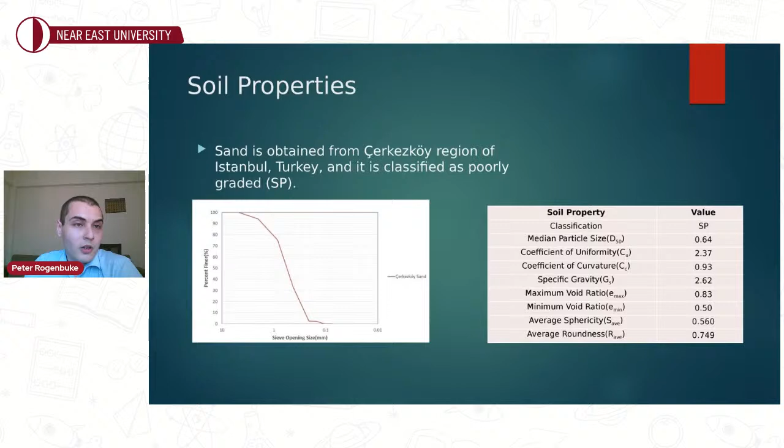Now we have our soil properties. We obtained our sand from the Çerkezköy region of Istanbul, Turkey, and it is classified as poorly graded. During relative density calculations, we used specific gravity and maximum minimum void ratios. Then we have our experimental method part.

In total, we conducted 6 experiments for this study: 3 of them with a buried pipe and 3 of them without the pipe. We also used 3 different relative density values to see the effect, ranging from 35% to 65%.

As you can see, we use normalized parameters. H is the vertical distance between the bottom of the foundation and the crest of the pipe. D is the constant pipe parameter, diameter. Our pipe was 75 millimeters in diameter. B is the foundation width, which as mentioned is 100 millimeters. And Q is the applied load.

For the buried pipe, we considered only H over D, the embedment ratio, equal to 1. Since D is equal to 75 millimeters, the distance between the crest and the pipe is 75 millimeters. The desired relative density was established by calculating the necessary soil mass for all the rigid boxes, using index values. Then we placed the soil in 10 layers, each layer corresponding to 1/10 of the total mass and total volume.

Now we have our results. We first start with the PIV results. As you can see from the figures, resultant contours at 10 millimeter displacement show that as relative density gets higher, the displacement field below the foundation becomes narrower. For the pipe case, with lower relative density, we see a higher displacement field just below the pipe, as you can see in these lighted regions. Lower relative density also leads to a wider displacement field just above the crest of the pipe.

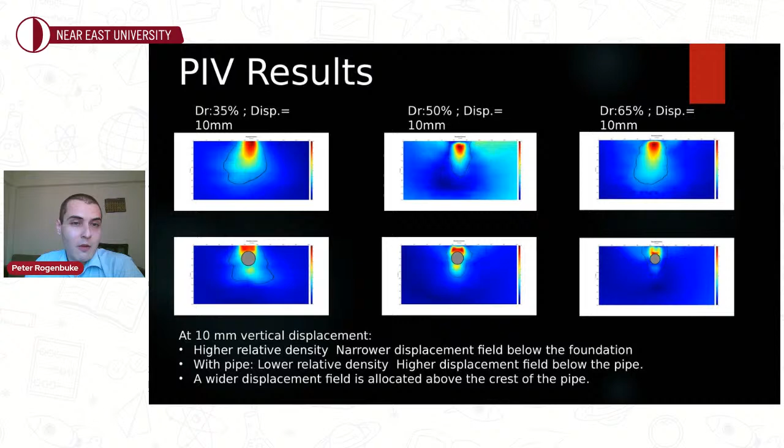Now we have our stress displacement results. As expected, the highest relative density gives us the highest load carrying capacity. In both cases, we get the highest carrying capacity at 65% relative density. But for the case with the pipe, load carrying capacity drops to around 70% for 35% and 65% relative densities. However, at 50% relative density, it drops only to 90% of the case without the pipe, showing a smaller drop at this density.

Now we have our conclusions. In this study, we tried to investigate the soil-pipe-foundation system by measuring base pressure and displacement acting on the model foundation, and visualize the deformation of the soil stratum using GeoPIV-RG analysis. This program managed to envision the deformation zones at different relative densities, and it's a valuable tool in visualizing deformation zones with the pipe, since the pipe leads to a different, separate deformation field depending on relative density.

Further investigations could examine the effect of geosynthetics or geogrids, for example georeinforcements, on the deformation field and bearing capacity, combined again with GeoPIV analysis. Also, for different soil types, this can be examined using the strain contours which GeoPIV can provide.

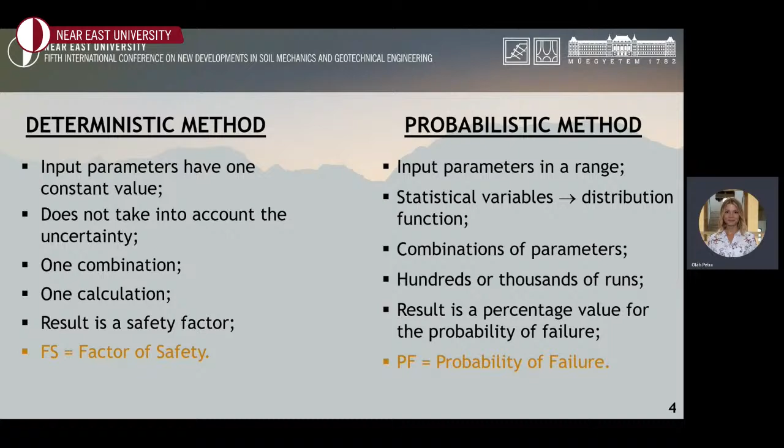The probabilistic method takes into account the uncertainty by interpreting distribution functions for statistical variables. It runs hundreds or thousands of different combinations of parameters, and the result is a distribution function of the FS values, from which we can conclude the probability of failure, or PF in short.

When it comes to calculating with a probability-based method, we need to enter the input parameters correctly. It starts with analyzing a large enough data set, and it is very important that we have a large enough data set. Then comes the determination of the most fitting distribution type using the method called goodness of fit.

After that, we need to determine the statistical parameters such as the mean and the standard deviation based on the type of distribution function, and the relative minimum and relative maximum values.

While the PSSA is a very nice concept, we should consider the following weaknesses: the stochastic distribution uncertainty, because the PF is greatly influenced by the choice of probability distribution selected for the input parameters, and the multiplication of uncertainties.

The more data we can use, the more accurate PF we can get. The parameter correlation uncertainty arises because the PF is strongly influenced by the correlation between the random variables.

The highest PF failure surface versus the lowest FS failure surface: Oka and Wu said that the failure surface with the minimum factor of safety doesn't necessarily have to be the failure surface with the maximum probability of failure. Therefore, it is necessary to consider all failure surfaces in a probabilistic computation, not just the minimum FS surface. There is also a lack of time dependency, because the computed PF doesn't have a time scale.

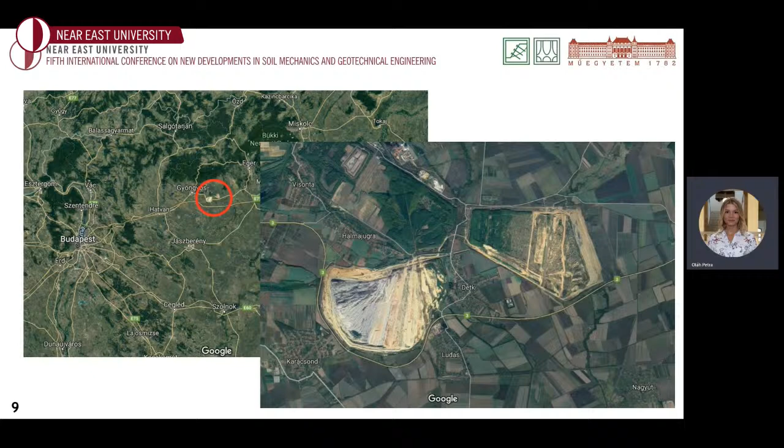On the examined mine, named Eastern number 3, it is required to design high slopes and ensure their stability before mining begins and also at the end of the mining process. The slope stability calculation started in a deterministic way, and then I checked the stability of the optimized sections on a statistical basis.

Out of 2,693 samples, I got 81 relevant, and out of 16 different soil layers, I could give statistical parameters for only 7. The random variables were the shear strength parameters, so the cohesion and the internal friction angle. The chosen method was the Latin hypercube method.

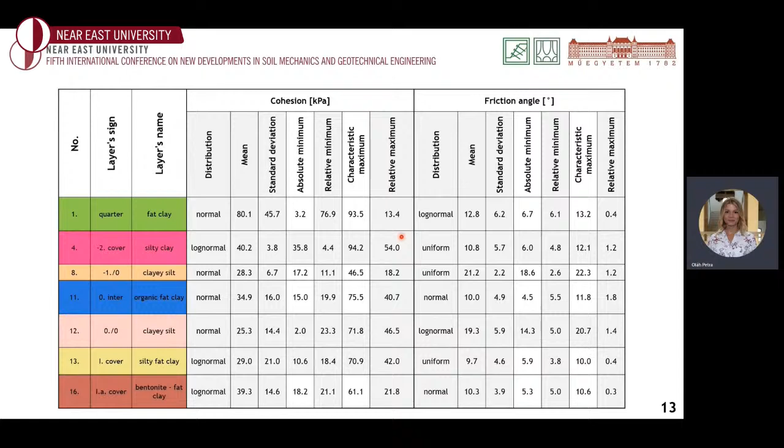This table shows those layers which had enough data for a statistical analysis. You can see their statistical values and the chosen distribution type here. There were 6 sections calculated: the first, the third, and the fifth on the south, and the number 21, 24, and 27 on the north side of the end slope.

The most exciting results came out of section 24, so I would like to introduce it to you. I started the calculations with the deterministic method. After optimizing, I got that the lowest failure circle has above 1.5 Fs, so according to the Eurocode, it is safe.

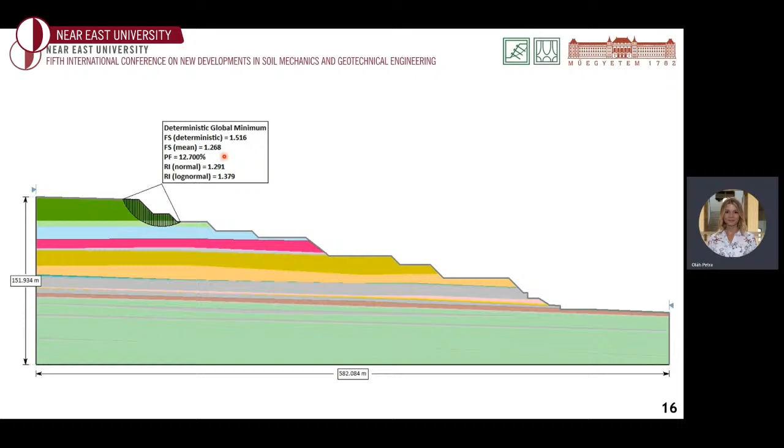Then came the probabilistic calculation on the same section with the same geometry, but with the statistical variables. In the case of section 24, I got that the Fs deterministic is above 1.5, it is OK, but the Fs mean, which is the average of the 1000 runs, is much less, it is under 1.3. But the PF is relatively high as well, it is almost 13%.

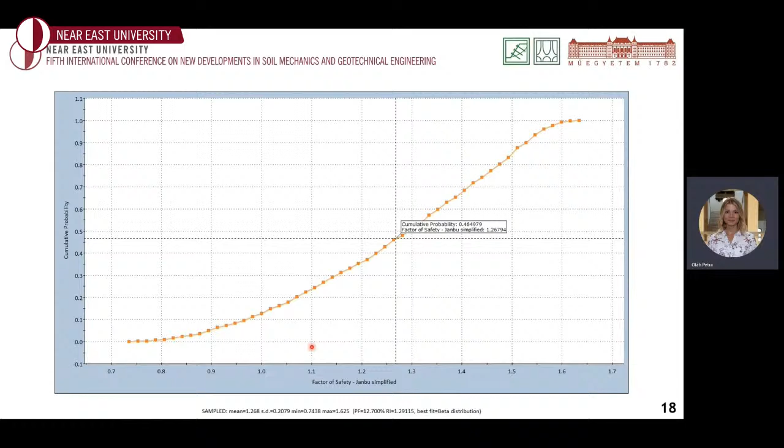We can say that the mean Fs were lower than the deterministic in every section.

And after all, the question arises, what is the maximum PF that can be considered acceptable in a slope design? According to the literature, we have certain tables that we can use to answer this question. For example, according to Sjöberg, slopes can be grouped according to the severity of the consequence after failure. It shows that the consequence of failure is related to the probability of failure and the reliability index.

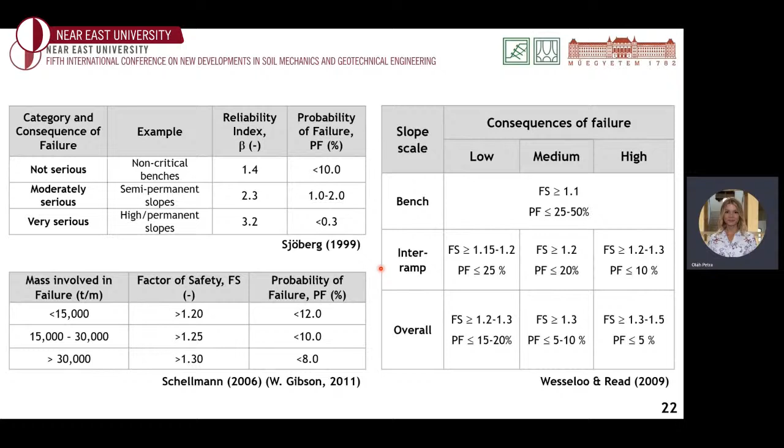Schellmann, on the other hand, said that we should consider the mass involved in the failure. And Wesseloo and Read defined the design criteria for the slope scale and also for the consequence of failure.

But there is another method which is called the Fspf selection matrix method, in which after 5 certain steps we can choose the minimum value of factor of safety and the maximum value of probability of failure according to the examined unique slope. There is a huge table from which we can select the minimum Fs and the maximum Pf for each slope. For example, for a mine like Visonta, it is required to get a Pf under 5%.

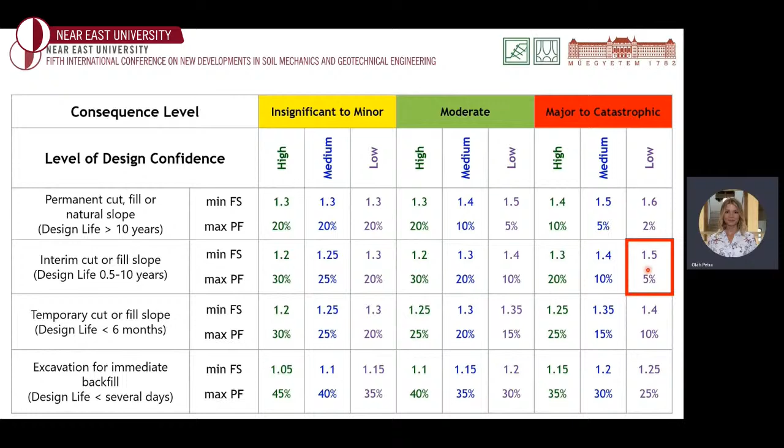To sum up, uncertainty should never be ignored in slope stability analysis. When we design slopes in a deterministic way, we usually complete the design when we reach 1.35 value of Fs. But in the case study, we saw that there could be combinations during the probabilistic calculations where the slope could fail. After all, in my opinion, we need to try to reach 0% probability of failure as close as possible.